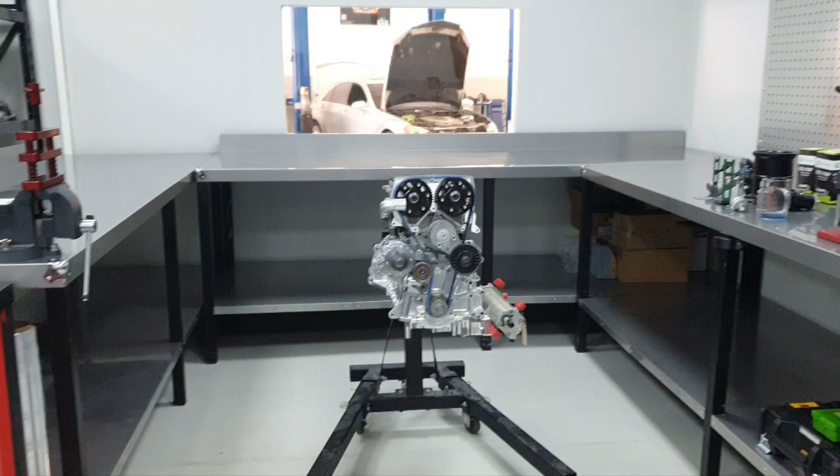Friday, January 12, 2024. 2JZ billet block. It's been built, clearly, obviously. And why it's here? Why it's here?

I don't know if it's okay if I can say all the story, what's happening. I'm not gonna say anything actually. It's not my business. I know the story, but no need to say anything.

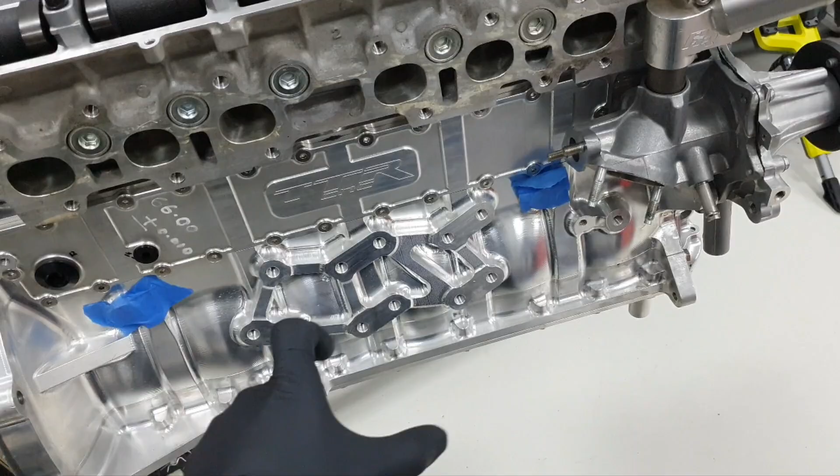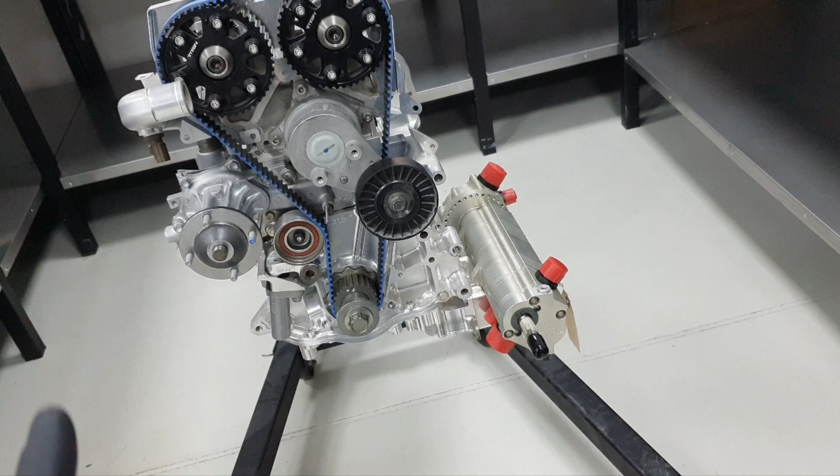Okay? Why it's here? I need to strip off completely the engine, measure the crankshaft, the journals of the crankshaft for the mains, for the connecting rods itself, the piston, cylinders, piston ring, do all the job actually, alright? And see that it's okay and doesn't have any problem. It never ran, the engine never fired up. They just put it together and they sent it to me here.

Okay? So, before I take it apart, what I'm gonna do? I'm gonna read the camshafts, when they're opening and when they're closing, to write down on the paper, because I wanna see in which degrees they put it exactly, for peace of mind. And then they're gonna send me the paper for the camshafts, where they're supposed to be placed, to be everybody happy.

Now, that's how I have received the engine. I haven't touched it at all. Even the engine stand doesn't belong to us. I received the engine with this stand, as you can see. There is a plexiglass here for the intake that I need to take out. There are these rags here on the spark plugs. They told me that the cylinder head is fine, no need anything.

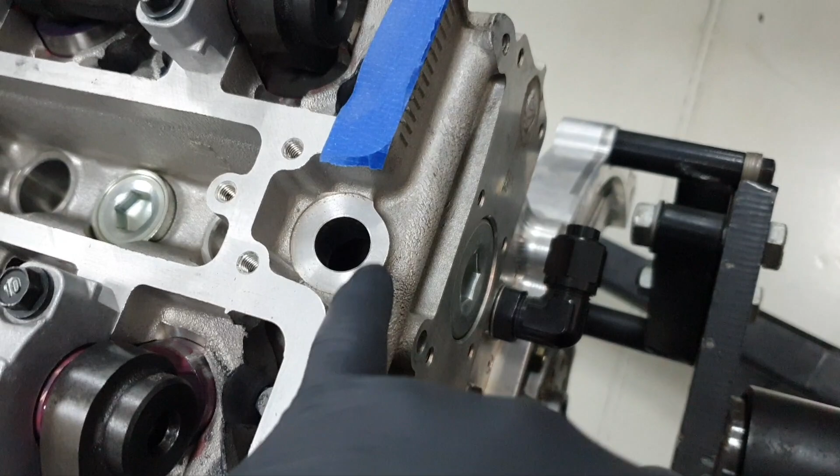Here, it's missing one fitting. From here, it's passing coolant. This is important to be here, the fitting. If you make the mistake and you block that one, you overheat number 6 and number 5 cylinder, the last cylinders. So here I need to have an AN fitting, as big as possible, if you're asking me. And you need to close the circuit for the coolant.

It depends in which country it's running. It doesn't matter if it's a billet block or a cast iron block, the stock block or whatever. You need to have this. You cannot block it, and obviously you're not gonna keep it like that. Usually they're welding here an AN fitting, and it comes here up. But you can tap it, you can thread it, and you can put stainless steel with some blue Loctite, and it can stay there forever.

Yeah, but it's okay. Usually they're doing it with aluminum. They're welding one aluminum fitting there. It's a little bit more sensitive and you have to be careful. Now, it's getting a two-way thermostat here. This is to not have fluctuation on the temperatures, to not cool fast, not be like the single-way thermostat. That's why you have this one.

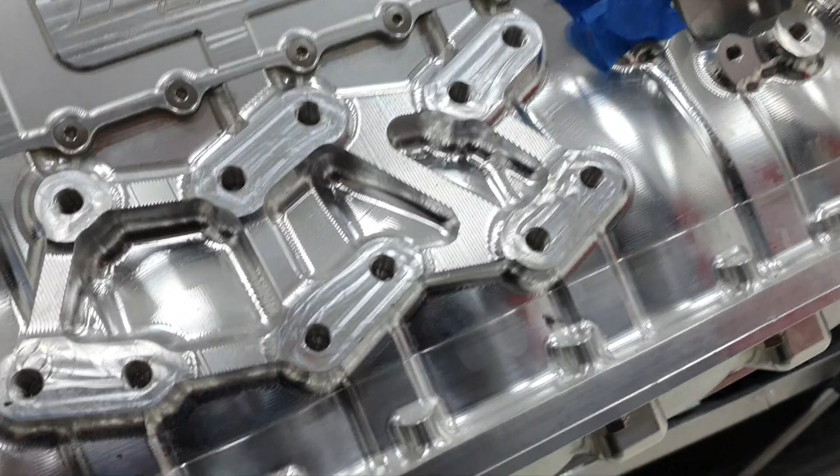But I don't know if it's smart to keep this function on a racing application, on a dragster application. Okay, this I'm gonna ask the owner, because for the cooling system, you can connect it so many ways. It depends on the heat transfer that you have, the ambient temperature, what kind of radiator you have. Sometimes you might not have enough space, or you might have an intercooler in front. You might not have correct airflow, and so on. All right.

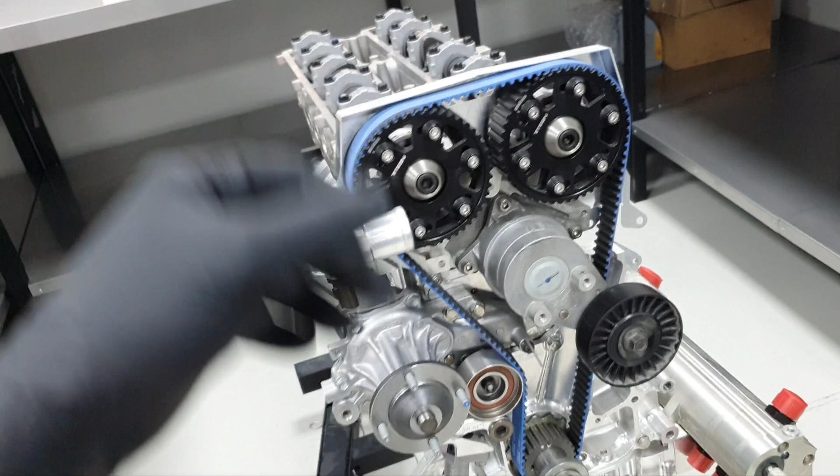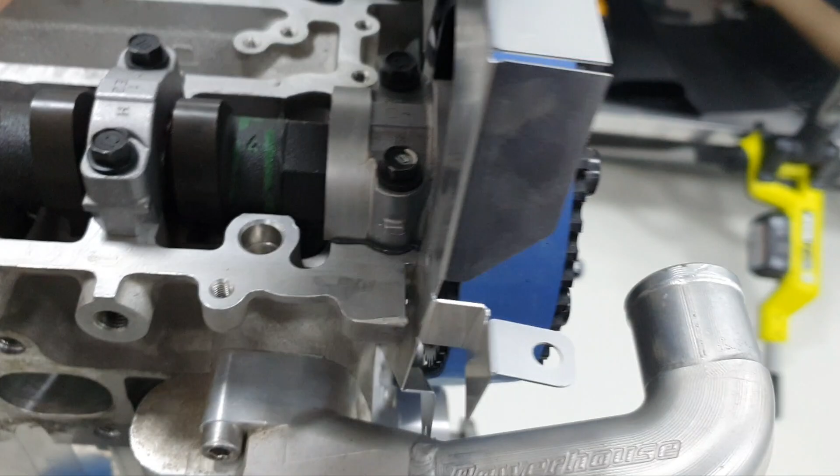So that's what I'm gonna do. Let me get the degree wheel, micrometer, and start writing some things down. Okay. This is not gonna be able to come out, because why? Because it's touching. Yes, because of this bracket. So I don't want to bend it. Yeah.

If you remove the upper radiator pipe here, it might be able to come out by turning. Yeah, okay, just a drop in the ocean. I might remove first this pipe here, then remove this one. So when I'm gonna rotate, it's not a big deal, it's light, it's just to not rub the belt on this cover. That's my point. Okay, that's it. Let's start working on it.

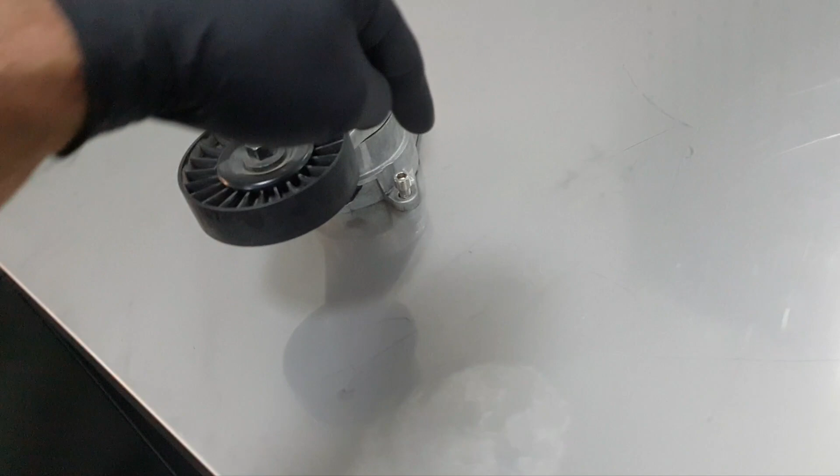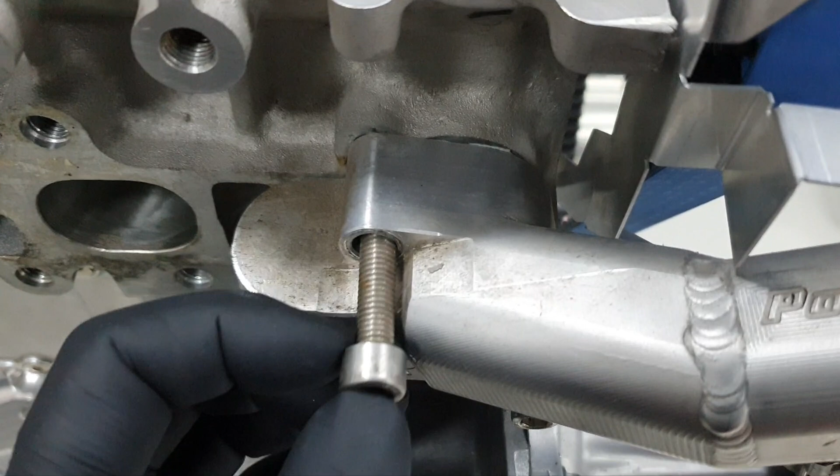Just for your information, I'm putting everything on the video, all the small details. I removed now from here the tensioner. None of the bolts was torqued down. Okay, I'm just saying. Here, these two bolts, they're not torqued down. This has correct length, the threads that are entering the cylinder head, but this up, it's not the ideal bolt to put on. You see, it's just engaging, I don't know, 2 threads only.

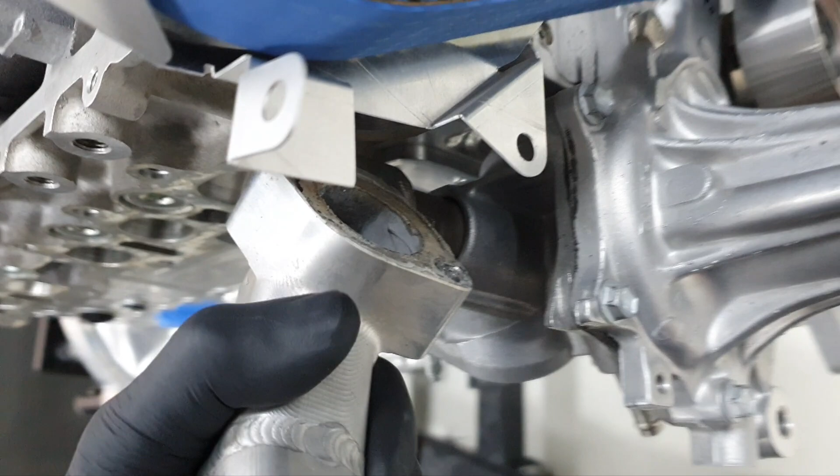So I'm not gonna choose this bolt for this. Then, I guess it does have a gasket. Yeah, it does have a gasket, it does have a silicone, it does have nothing. Yep. Here they put a silicone. The O-ring doesn't look new to me.

And there is one mark here on the cylinder head. When I make it up, it hit here. Alright, just give me a break. There's no problem at all. I didn't even scratch it.

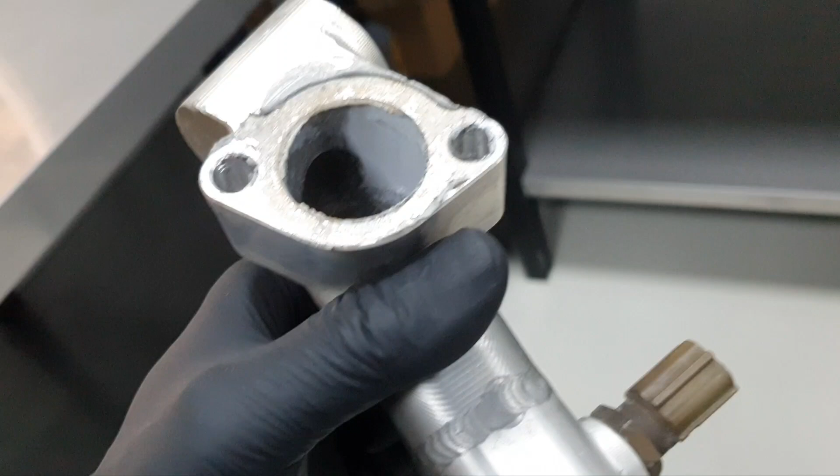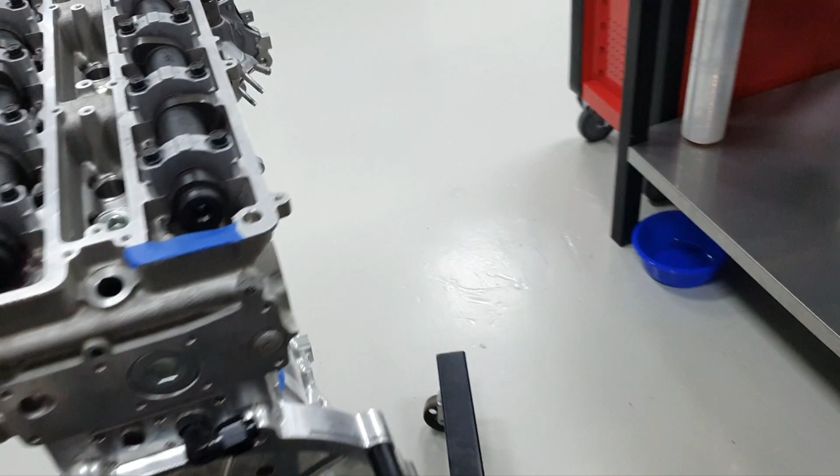Alright, so the long one was down here. The short one was up here. And now you can see the difference. You're not gonna choose this bolt here. You're gonna choose a bolt the same length as the other one, down. It's supposed to have enough threads inside. Yes, it does. It has even longer.

Then you have here this mark, this dent. And when you have this kind of thing, it's a good thing to file it, to not keep the plate outside, to not have any headache in the future. I also saw another thing here in the back. Here in the back, this is a plug, okay, like this one. It's like a ball bearing, but it's press fit inside.

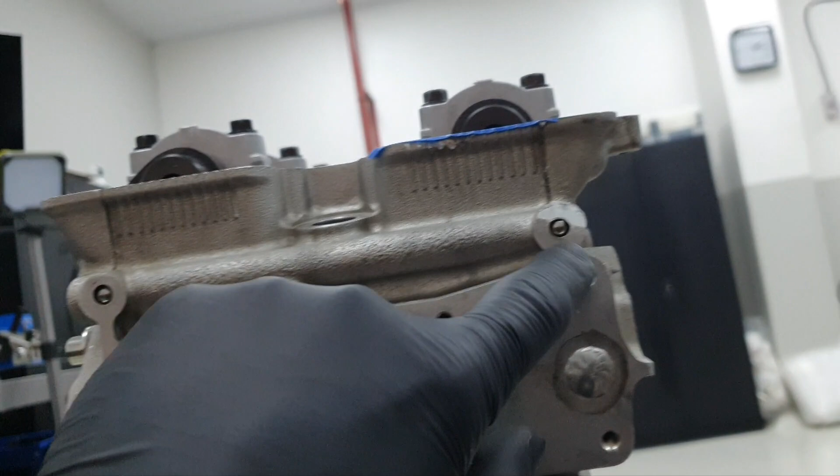Here, they dented it. It's not supposed to be like that. Cylinder head here, it's supposed to be like this, not like this. Okay, and it's supposed to have also another one here, because this is how they're drilling it from the factory. They're drilling like this, they're drilling like that. This is an oil gallery to supply oil.

Another thing here for the EGR that communicates with this hole here inside: you can put a fitting, thread it, make a fitting with one block like this one, smaller than this, it doesn't need to be so big. You can have it as a reference for the back pressure. You can unplug it, put the pipe, one pressure sensor, it will be far away, it won't get burned, and then you can have an idea what's happening between the valve and the turbine wheel. It's nice, it's not bad.

Okay, so you get the picture, step by step. Whatever I see and I don't like, I'm putting on the video, like any other time. Let's move on. And I'm getting the degree wheel. I'm trying now to put it on, to start degreeing the camshaft, to get the numbers actually. Alright, and they brought me the aluminum piece for the intake manifold.

Okay, I said don't bother me with this engine. Okay, we start nice. Let me pause this one now to finish the intake manifold for the C-Class outside, the 204. I have it over there, and then continue with the engine. Wish me luck, don't mix up the videos. I might mix it up and you're gonna see the intake manifold with the billet 2JZ. Lovely. Okay, finished with the intake manifold for the C-Class. You see Mr. Romer there? I have no clue what he's doing, yeah?

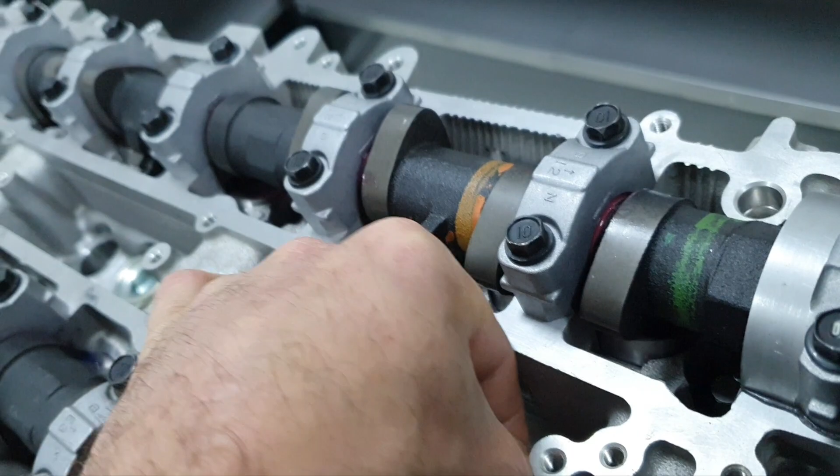Back to the 2JZ. Now, let's get the stopper. This is stopping the piston to find the top dead center. Where I'm pointing, I don't know where I'm pointing. I need to fix something on that to hold it. What I'm gonna do, I'm gonna use this stopper to stop the piston. Then I'm gonna go front and back, and then I'm gonna zero it out.

There you go. Come on, what, it's not clean the threads or what? Let me have a look, 1 second. Don't make any disaster here, any explosion. Okay, now we have 40 after top dead center.

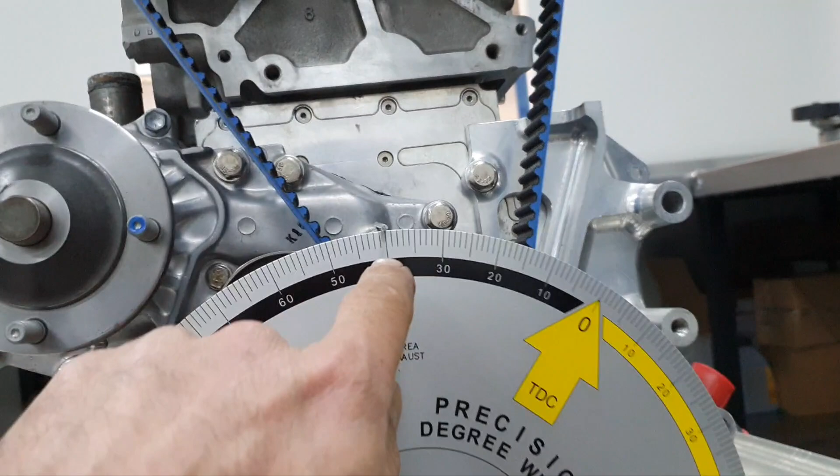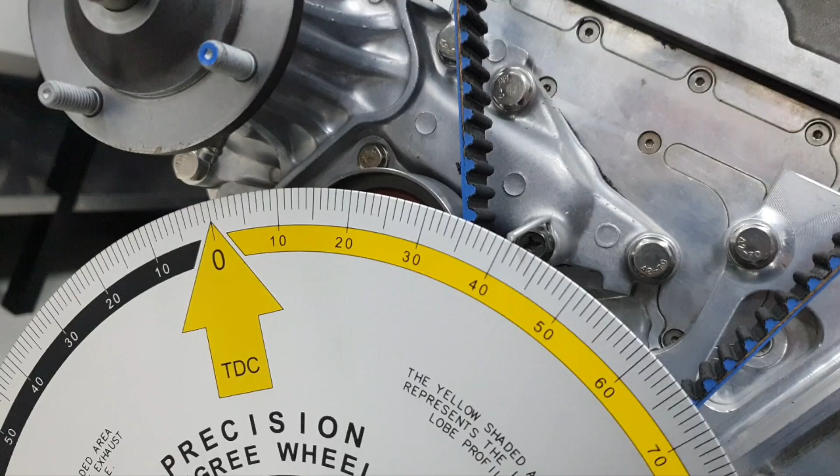Counterclockwise I use the degree wheel. And clockwise it will stop. It will stop me at 40 before top dead center. There it's stopping. So I have 40 degrees before top dead center, and counterclockwise I have 40 degrees after top dead center.

What is it? Before top dead center is here, 40 degrees before top dead center, and 40 degrees after top dead center when I'm going counterclockwise. So my zero mark here is the top dead center. Okay, let's do it. Let's remove the stopper and continue. And now this one, that's the true top dead center.

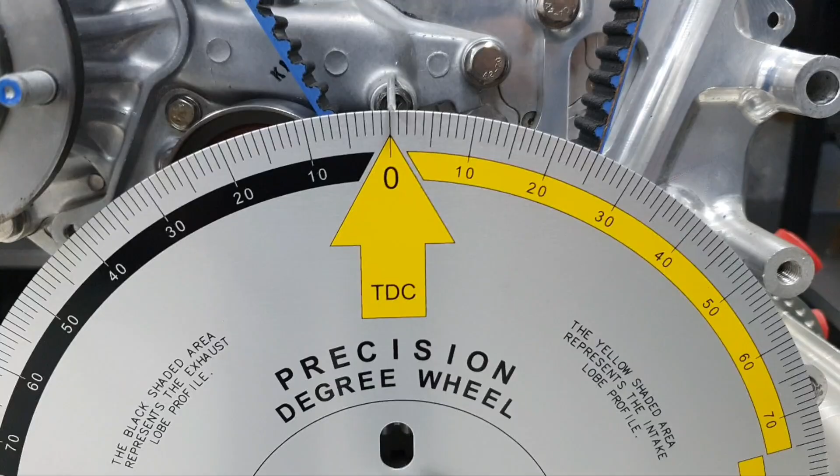Yeah, just make one dot on the center of the piston, but it's not important. It's not even a dot. We're gonna see that later when I open it, what it has inside. I don't get it, but yeah. Okay, let me get the dial indicator to start getting some measurements.

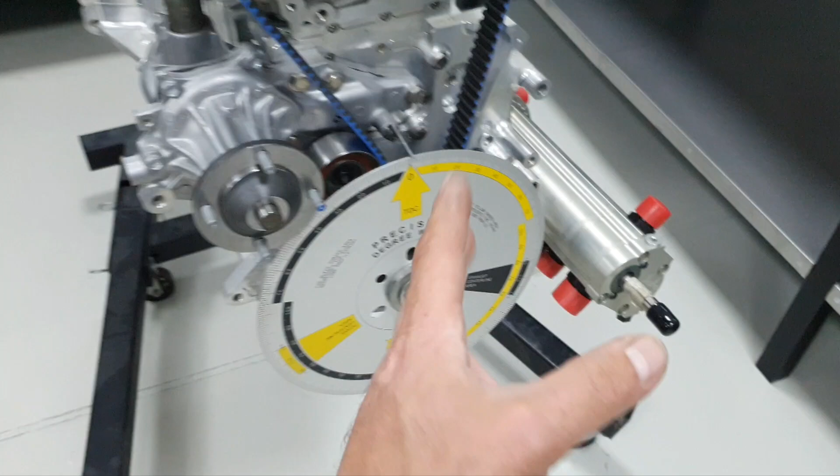All right, to see the degrees. Keep it as this. I torqued down the damper pulley, the bolts for the crankshaft, the main. And from now on only clockwise, not counterclockwise. Counterclockwise I did it only to find the top dead center. Now only clockwise so we don't compress the tensioner.

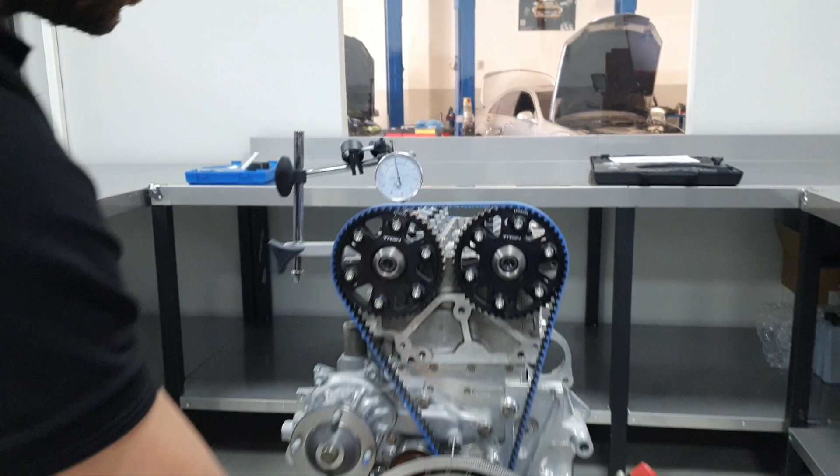I'm recording. All right, follow me here. We have here 100 millimeters, a little bit less than 100 millimeters, it's fine, it's acceptable. And here we are at top dead center, all right? I'm taking the exhaust camshaft. So now, at 1 millimeter lift, point down the micrometer, here. Let's go at 1 millimeter lift. It was a little bit past the zero, it was there.

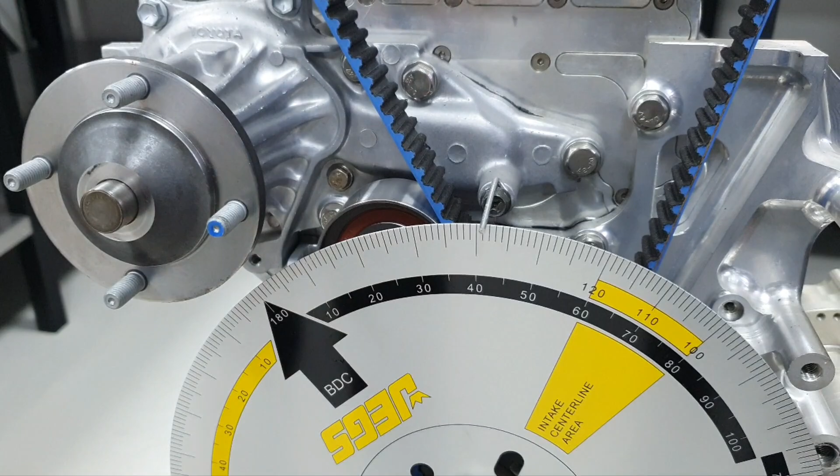Okay. So what do we have here? We have 41 degrees before bottom dead center. You get it? Come close. See. Don't touch anything here. 41 degrees before bottom dead center. What I have right here: exhaust valve opens at 1 millimeter lift, 41 degrees before bottom dead center. Correct? Correct. Let's move on.

Now, the lift for the exhaust valve is 10.06 millimeters. I highlighted it here. Let's find it now. It moves 1, 2 millimeters, 3, 4, 5, 6, 7, 8, 9. Wait, no, stay there. Stay there. Okay. 10.

Now, if I move it more, you see it's 10.06 millimeters the lift, okay? And you see here, it's at 105, the center line. All right, I wrote down 101. Now, where I found 101, in any case, skip this one. Let's go 1 millimeter before closing the valve. A second, shift it. No, it's okay. Stay there. All right.

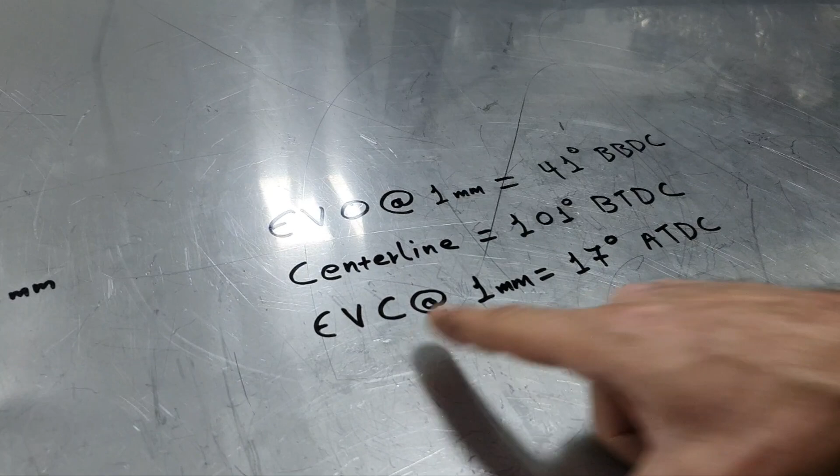Now, there, it's 1 millimeter before it closes the valve. And here we have almost 17 degrees after top dead center. Come here. Exhaust valve closes at 1 millimeter lift, 17 degrees after top dead center. That's what we have there, right? Yep. After top dead center, 17 degrees almost.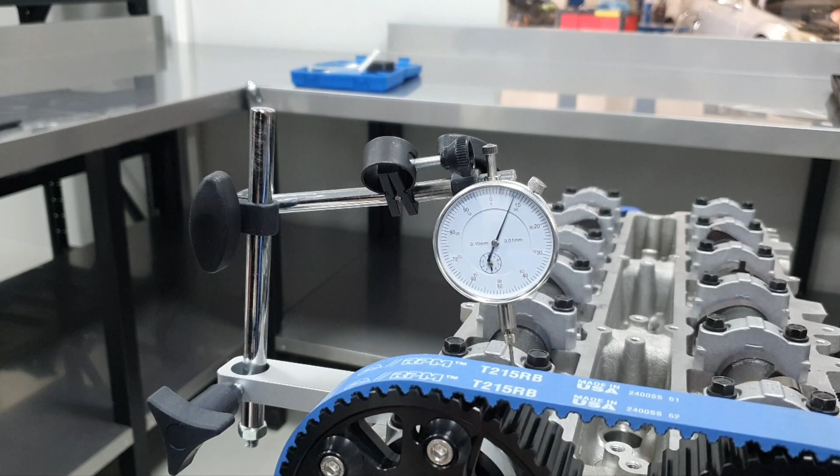Let's do it again. Put it there. You see, it comes again. All right, it's fine. Let's do that again, one more time. Let's spin it. Now, let's go again at 1 millimeter. All right, and we are 41 degrees before bottom dead center. That's the key. 41 before bottom dead center.

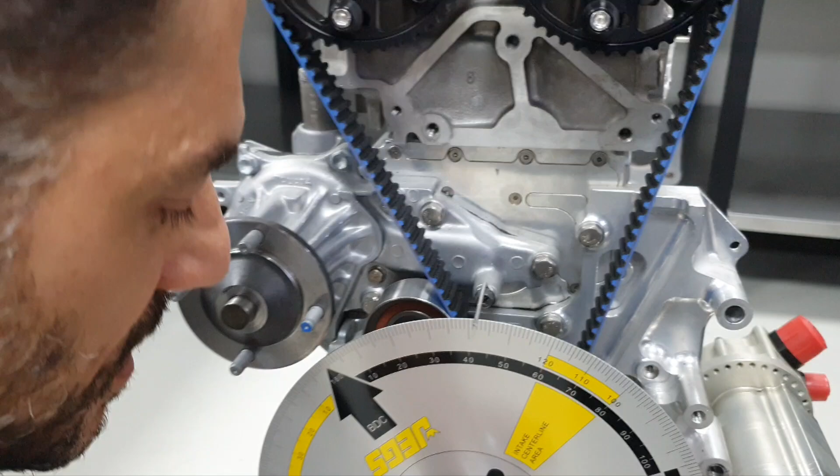We are going to the 10.06 millimeters. Okay. It's supposed to be there, because now you see it's 101. Yeah, it's 101 now. Now if I move it, it's gonna start closing the valve. You see? All right.

And then we have, keep it there on the indicator. Okay. So now, 17 degrees after top dead center. At 1 millimeter lift, it starts closing the valve. And now let's turn it to go to top dead center, because I have to do the same thing on the intake. All right, that's top dead center. We have almost 100 millimeters till the zero point.

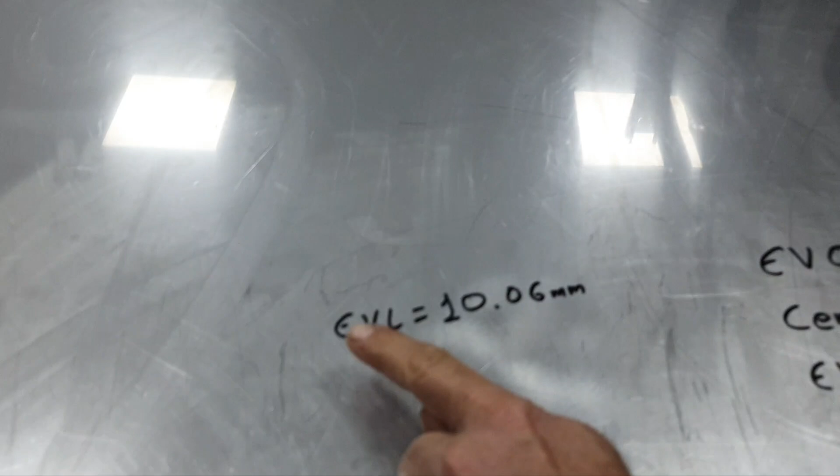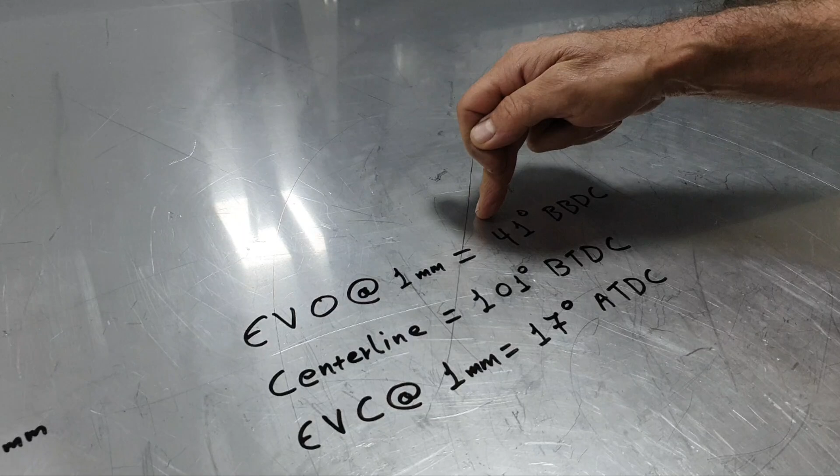And what do we have here? Exhaust valve lift for the specific lobe: 10.06 millimeters lift. The exhaust valve opens 41 degrees before bottom dead center. Center line 101 before top dead center. Exhaust valve closes at 1 millimeter lift, 17 degrees after top dead center.

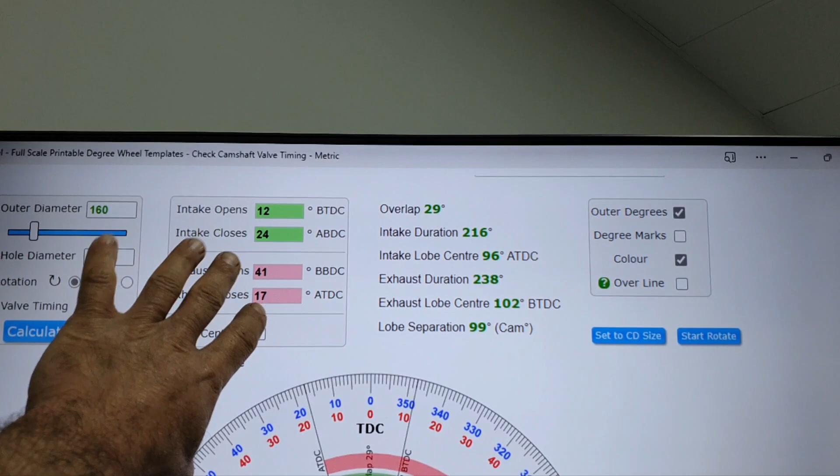Now give it to me here. I put in when it's opening the exhaust valve and when it closes the exhaust valve. And it tells me that exhaust duration is 238 degrees. I don't have to calculate. And exhaust lobe center 102 degrees. Lobe separation, okay. Don't pay attention to the intake because I haven't measured the intake yet. The intake is the data that was there.

Now, let's continue. Let's do that on the intake lobe to read the camshaft. By having this data, I'm gonna know exactly where they degreed the camshaft, and when they bring me the specs, compare from there. Another thing I need to do is see how much clearance, how much I can move the gear, to see how much room I have between the valve and the piston so there's no contact.

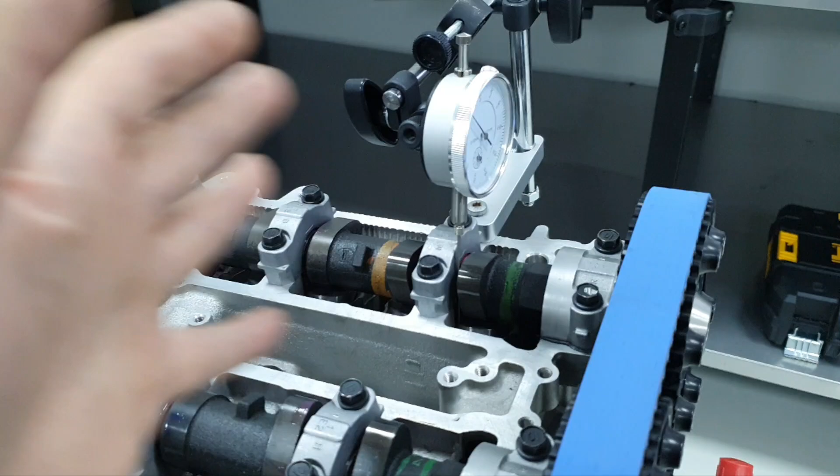How much I can go advance or retard to see what's going on. Continue. All right, let's have a look at the intake. I have done this 4 or 5 times. I don't even remember how many times, because some of you are gonna say, what is this, what have you done? As long as it's not spring loaded and it's solid and it's repeatable, I'm happy.

Each time that I'm doing it, I'm resetting it. I'm removing it from the zero and I have to zero it out again, all this that you see, and I repeat again and again. All right, 4 or 5 times till now, the same thing also for the exhaust. Classic like any other time. All right, now, what do we have?

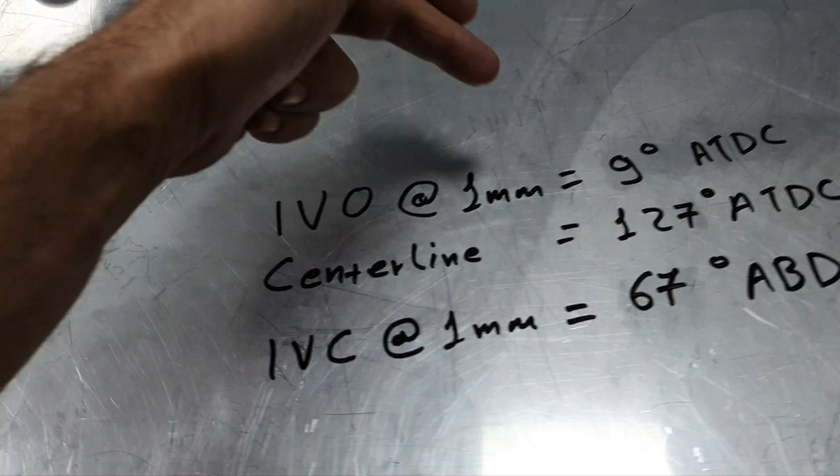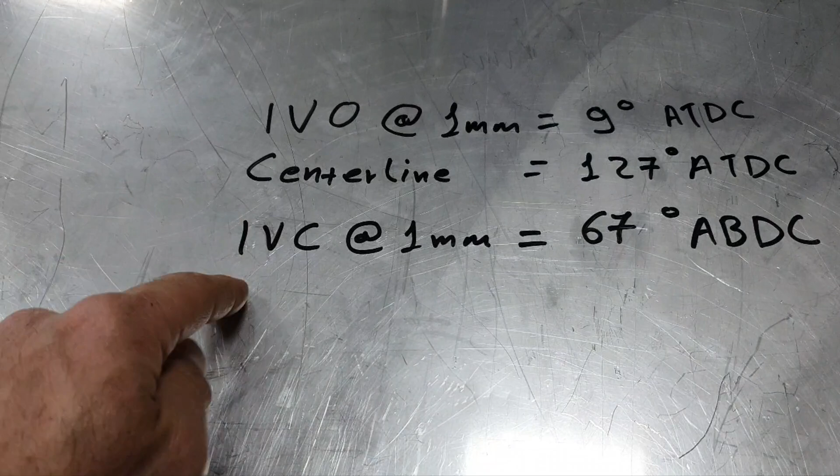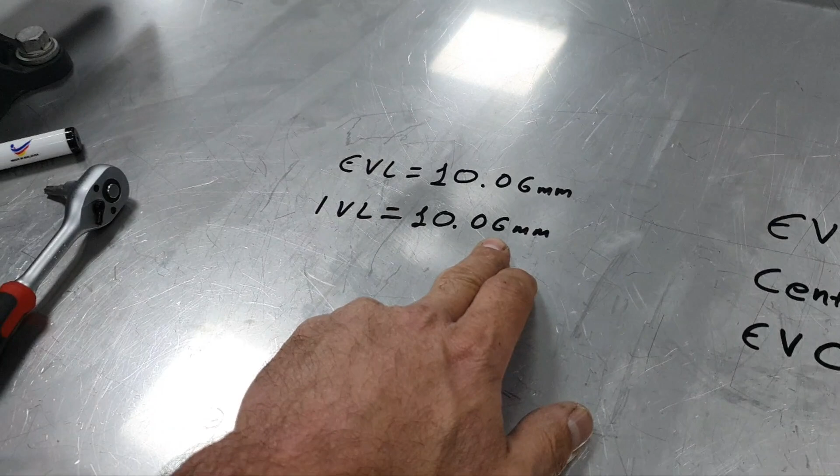Intake valve opens at 1 millimeter lift 9 degrees after top dead center. Okay. Center line at 127 degrees after top dead center, 127. I was expecting to see something like 107, and I was expecting to see something like 11 degrees before top dead center. Yeah. And intake valve closes at 1 millimeter lift 67 degrees after bottom dead center. Okay. Now, 10.06 millimeter lift for the intake valve and for the exhaust valve.

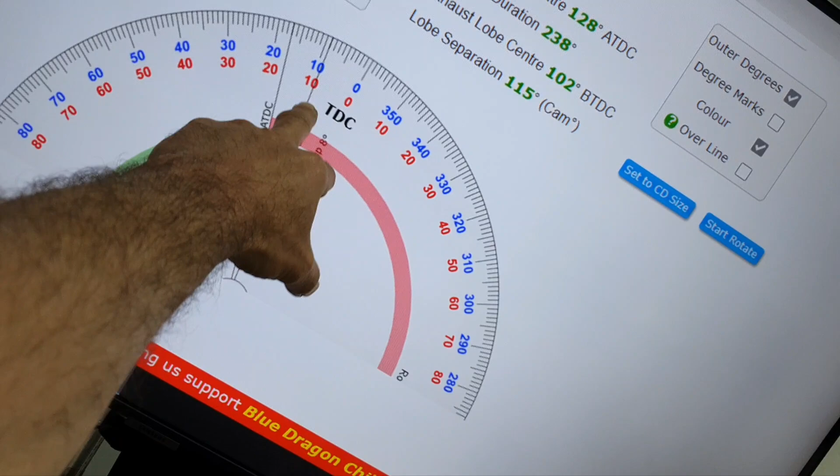All right. Center line, I found it 127, and what we have here is -9 because it's before top dead center. So if I put 9 degrees before top dead center, I'm not gonna be right. I have to write minus. You can see here, -9 degrees before top dead center, you see? And it's after. Yeah, that's the point. 67 when it's closing, and it's giving me intake duration 238, exhaust duration 238, okay.

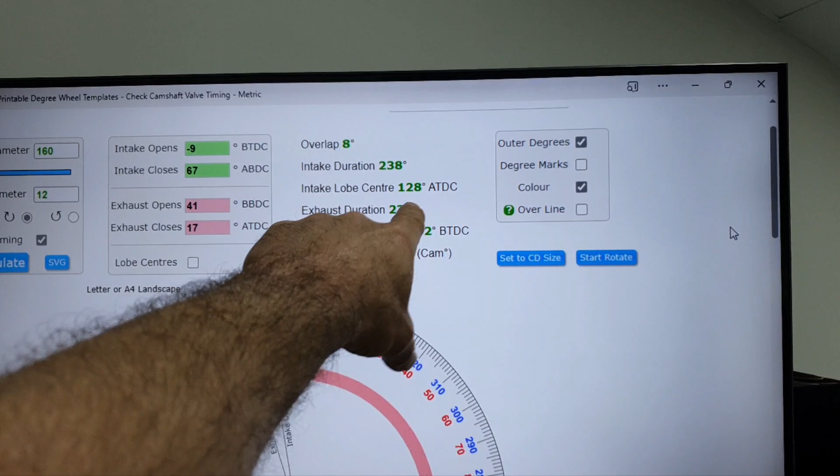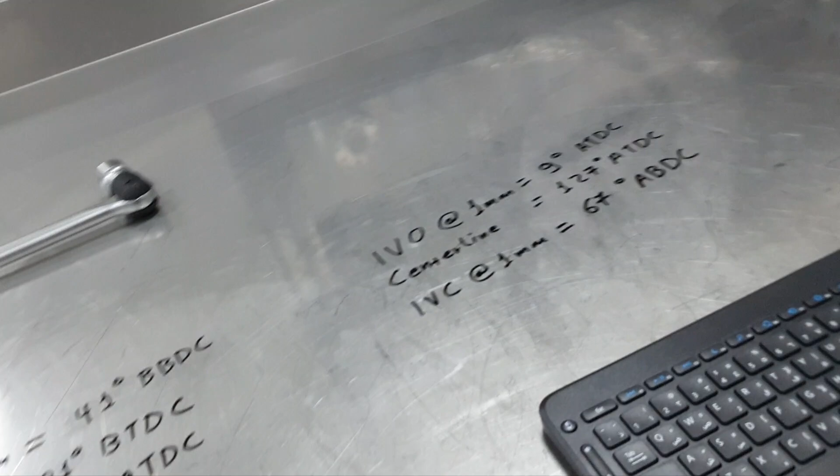Intake lobe center 128, I found 127, all right. Yeah, you can give me half a degree plus minus, okay. Give me a break. Now, I want to see the specs for the camshafts. All right, I'm gonna write it down on paper to have this data. And now, since I know the camshafts, where it's supposed to be, how it's been degreed on the specific engine, I can see how much I can play, right? I can see how much I can play.

This is full at the end. It's not worth it to change the teeth and then it might not. Yeah, okay, it is what it is. You might play with the teeth and then the adjustment, you know. All right, never mind, this is not the time. I just want to see, now we're gonna bring the camera. I just want to see how much distance the valves have, because now it's a good chance.

Why? Because there is the head gasket that you're gonna run this engine with. Everything has been bolted down. There is no dummy gasket, there's no old gasket that I open and close again. So it's a very good chance to see how much room we have, how many degrees before we touch the valve, how much I can go maximum and minimum. Because after that you can't play.

It depends where you want the torque, where you want to have horsepower. For example, you can shift the power band. It depends on the application, the transmission, the gear ratio, it depends on so many things. It depends even on the drag the car has. It's different if you have a good aerodynamic car, and different to have a curtain, a parachute, trying to beat the wind, the air. I hope that you understand what I'm saying.

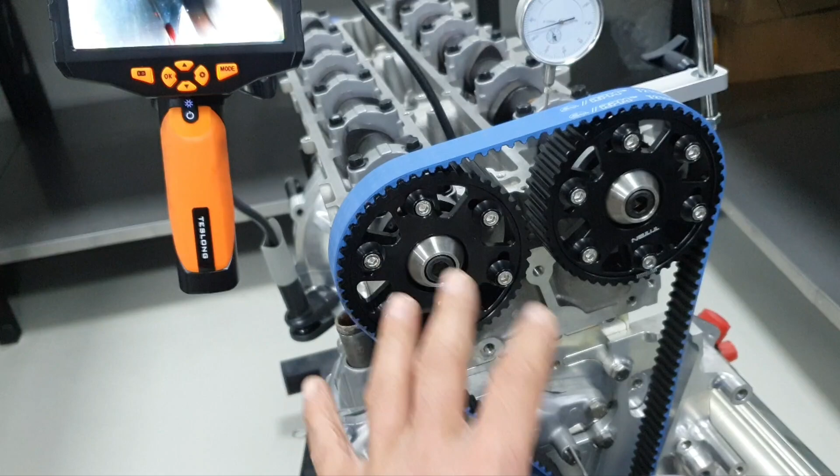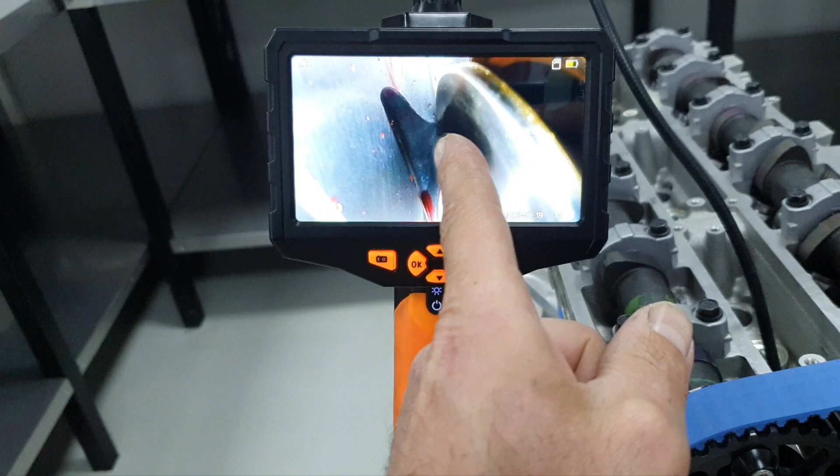I'll just have a look here on the exhaust to see how much space we have, and as it is right now, there is plenty of space. You can put it wherever you want. It's not gonna touch. What you see from here till this is the cut relief on the piston, and that's the valve here. Plenty of space. I'm gonna show you.

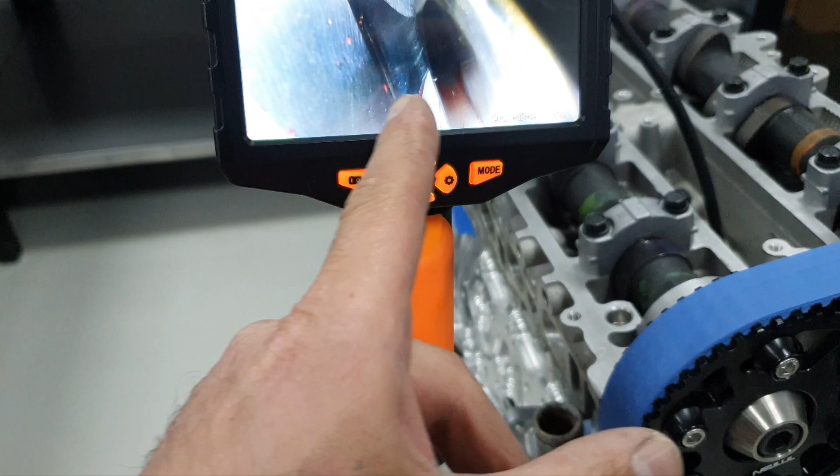Okay, that's the valve here, and this is when it's open, and now it finishes the gear. Oh, with these pistons there is plenty of space. I mean, if you have valve contact to the piston, that means either you have too many RPMs or you have too much boost, and not on the exhaust. On the exhaust, the back pressure. It depends on the back pressure that you create inside the manifold. From the intake I'm talking about.

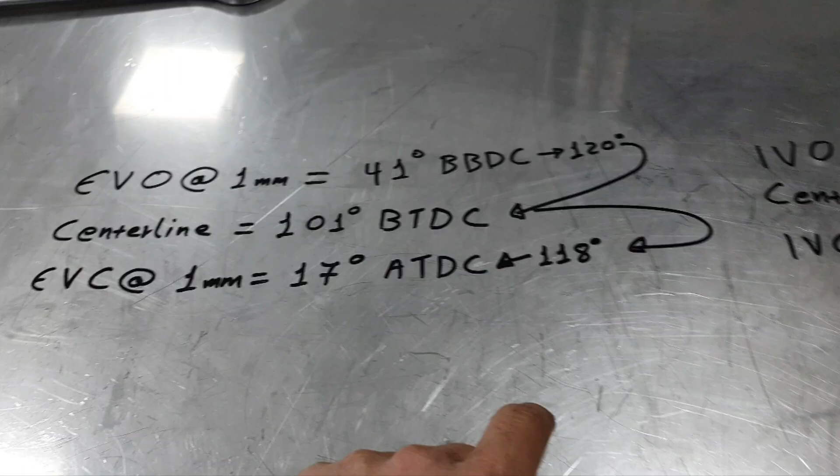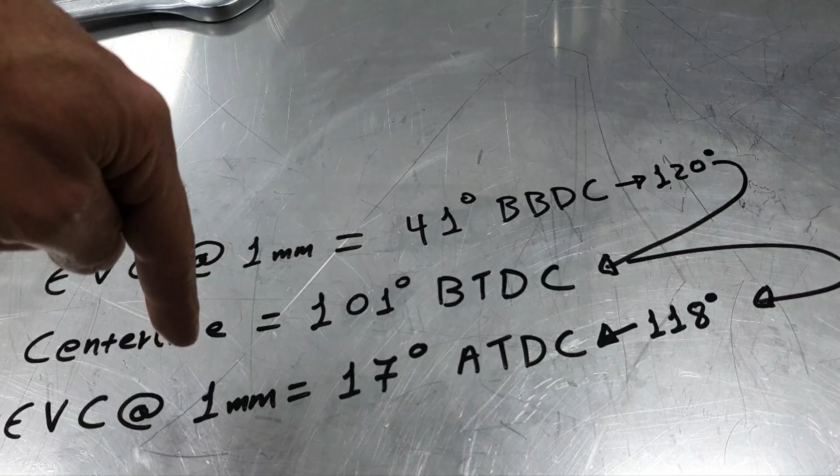All right, let me remove everything. And then, like I said, I write it on a paper. If you're wondering what these numbers are, this is 41 degrees before bottom dead center to go to the center line, to the maximum lift of the lobe. At 101 before top dead center, it needs 120 degrees. That's one lobe. That means it's almost symmetrical.

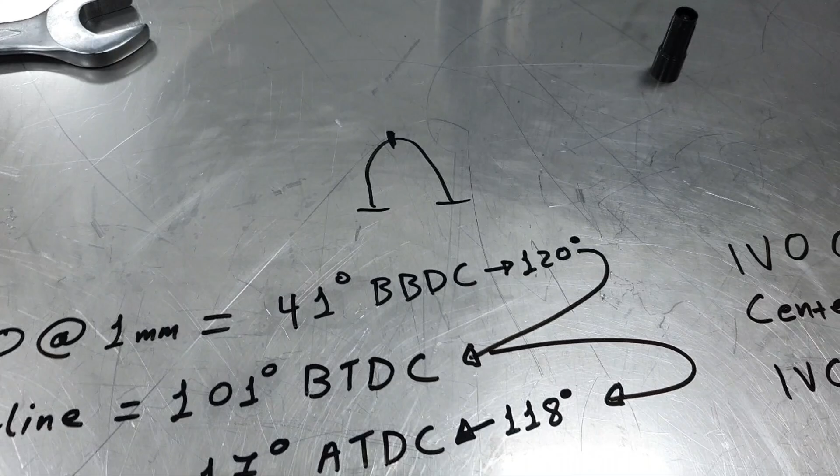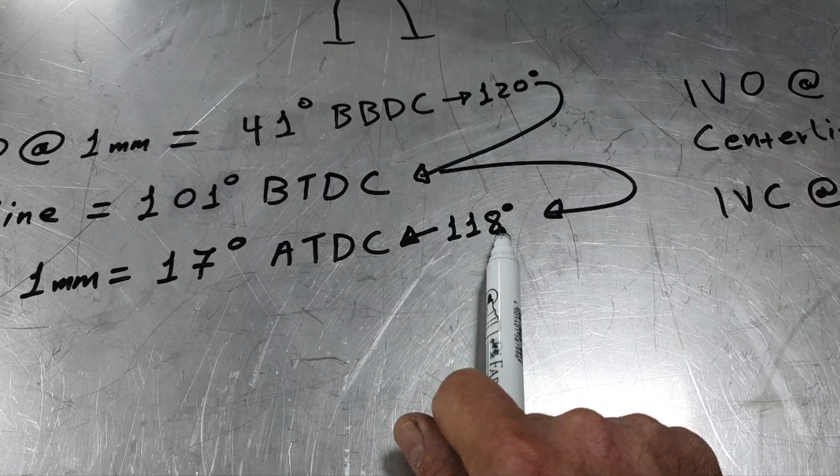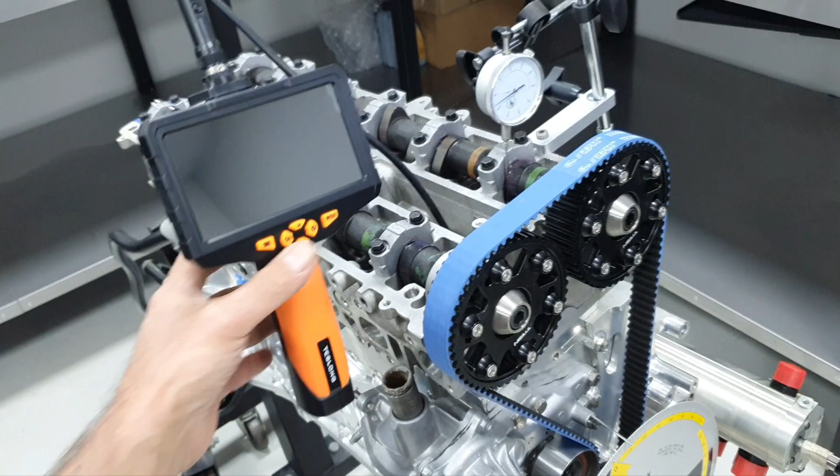I need the paper for the camshafts, and I have to continue stripping off the engine. Let me tighten also this gear. I write also which mark it was on, just in case. Not something crazy. I'm not torquing it down for final, obviously. Usually with these gears, even if you torque it down, let's say, 5 Newton meters, it's more than enough, it doesn't slip. I have to see the torque spec, supposed to be something like 10 or 15 Newton meters, I don't remember exactly. I'm gonna check it. In any case, let's move on.

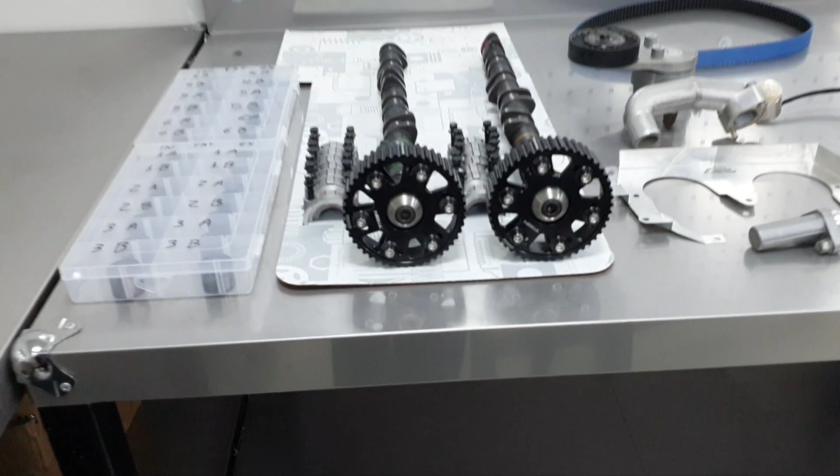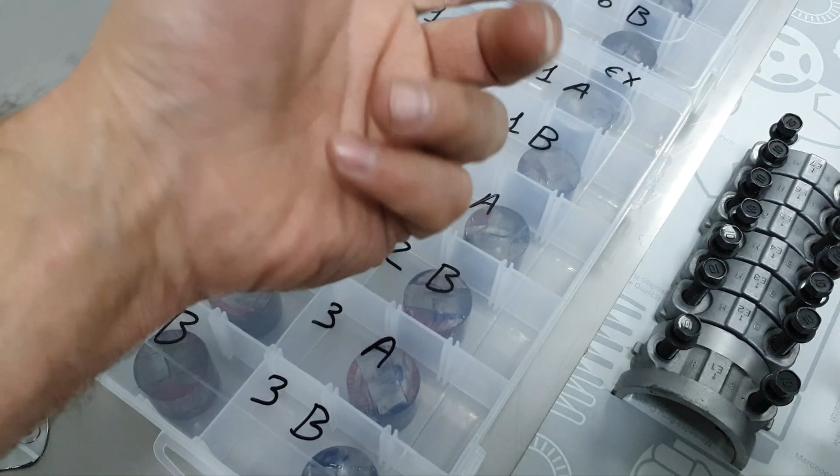All right, camshafts, cam followers, the caps up, out. All right, it's in order here. Exhaust, intake, and these are the cam followers. It's not hydraulic. It's normal buckets that you grind inside to fix the clearance. It's in order because if you mix all this up, then you have to find out which one goes where. You'd be busy with one feeler gauge all day, maybe two. This one has masking tape. I don't get it.

Aha. I was wondering, I saw that before. I said, why have masking tape on the cylinder head here? This here has a dent, and here has a crack. That's why there was masking tape here. Who put the masking tape here? They put it to hide it or what? Yeah. Lovely. You remember, I think I mentioned that about this head. Alright, moving on.

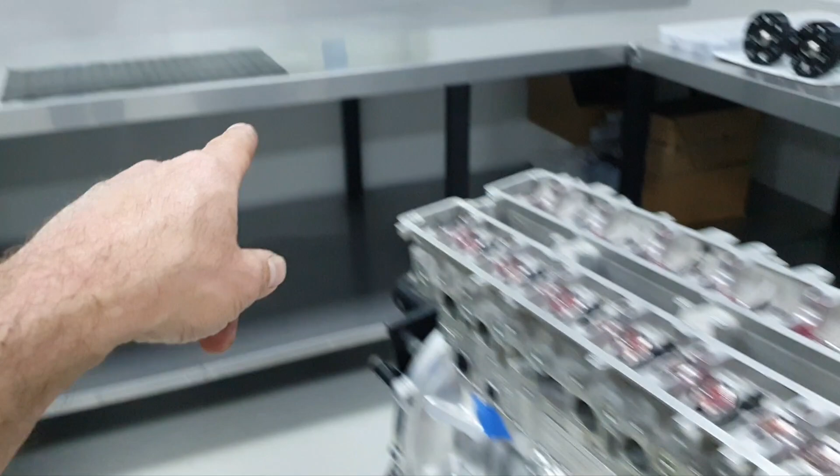I removed the belts over there, okay. The tensioner is over there. This is not mine. It was very convenient that it was here because I used it for the degree wheel. I'm gonna put it back in place at the end. Alright, moving on, stripping it off, removing the cylinder head. I have the rubber mat here to place the cylinder head on.

I just removed the followers, the cam followers, the buckets. Why? Because I'm gonna tilt it and put it here to see the combustion chamber side. I just want to put it sideways to see the surface, to see the combustion chamber, and just to have an eye on the intake and exhaust valves. Let's continue, let's open it.

By the way, these studs, you cannot put them in like how I put the previous studs, because they're a different diameter down in the block. It's bigger. So this is an exception. You cannot do it like normal studs, where you put the head gasket, the cylinder head, and then pass the studs from above. It's not gonna work because it's bigger down and it's not gonna pass through the cylinder head. Makes sense, right? Let's take it apart.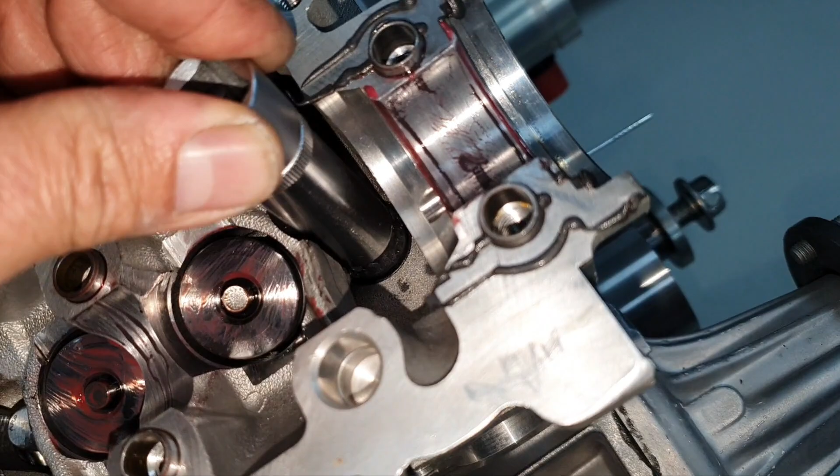You remember the last time with the previous 2JZ, with the 1/2 inch socket? I replaced it, I broke the first one. Now in this case, it looks like it's 9/16. But you need a long 9/16. I don't have a long 9/16. What do I have? I have 14 millimeters. What's the problem with the 14 millimeters? The only problem is that it comes nice and tight. This is not a problem, this is a good one, this is always welcome, when the socket fits nice and tight.

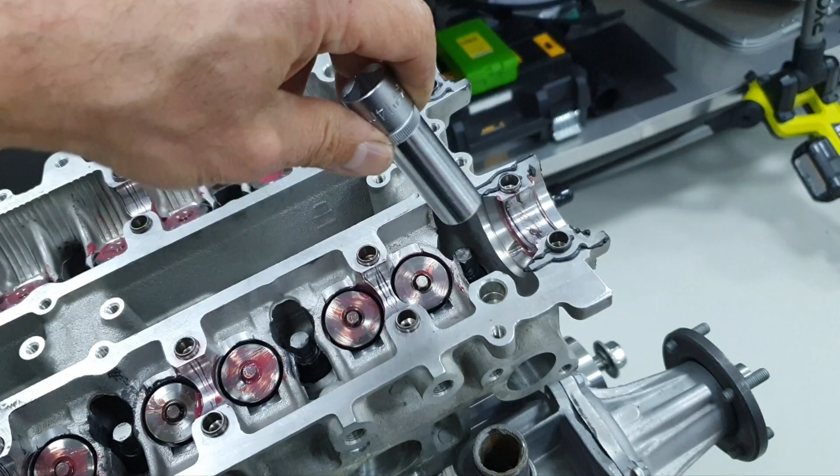The thing is, what it takes, I can tell you what it takes. On the inline 6, when I have such a long cylinder head, me personally, I don't know what the other guys are doing, but me personally, I start removing a little bit. I mean, I'm not loosening completely the nut in this case, or the bolt if it has a head bolt. I'm not loosening completely this one, completely that one, and then moving on to the rest. I'm going gradually, a little bit each nut, until it lifts up nicely. In the same order as you're torquing it down, same thing in reverse, that's how I'm taking it apart.

And now I have to stick this inside and then unstick it how many times? Tassos, stop complaining, eh? Leave the phone and start working. That's what I'm gonna do.

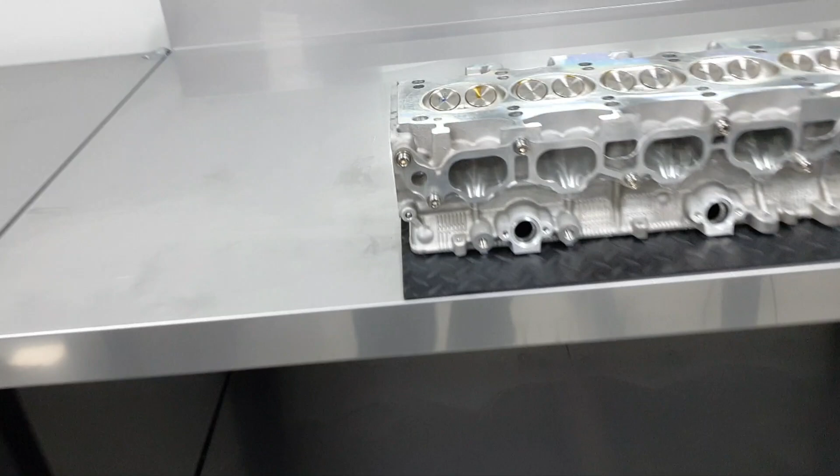Cylinder head out. I'm gonna show you a couple of things that I've been screaming about for years now. I'm saying that when you have the studs like this, in this case you cannot put it from up. Like I said, it's impossible to put the cylinder head on and then pass these studs from up, alright? Because it's threaded inside of the engine block. But I'm saying that when you put the studs like this, you're always gonna trap some metallic shavings between the head gasket and the cylinder head. This is 101, that's what I'm talking about, alright?

Second thing, what I see here and I don't like, I see that there is a misalignment and I see the fire ring entering inside of the chamber here. It has a lip. What I'm talking about is clear, to my eyes at least. You see that I can see here the sleeve, the cylinder? There is a lip here. I'm talking about here, there is a lip, alright? From this side, there is no lip.

It's positive. The ring is entering inside of the cylinder. That's not right. And here it has plenty of space. That's not right. It's not aligned properly. It's not correct. Then if you come here on the cylinder head, you see another big mistake, I'll say. I'm gonna show you. Let me get one ring from here. Let's get number 3. Why not? All right. Oh, come on.

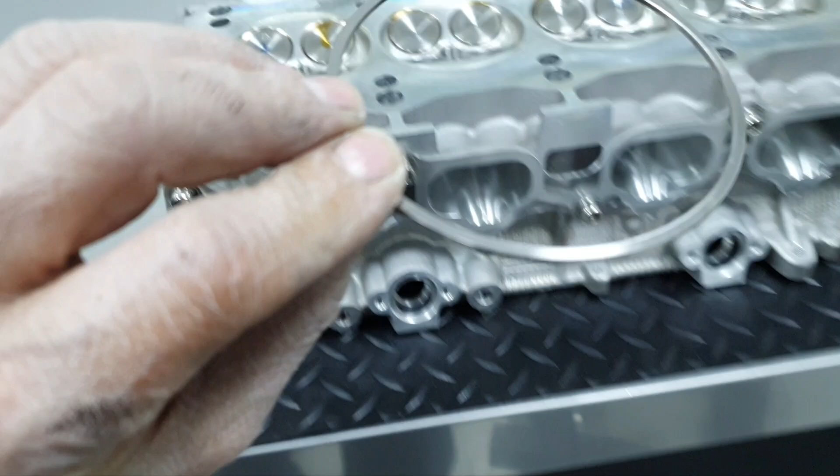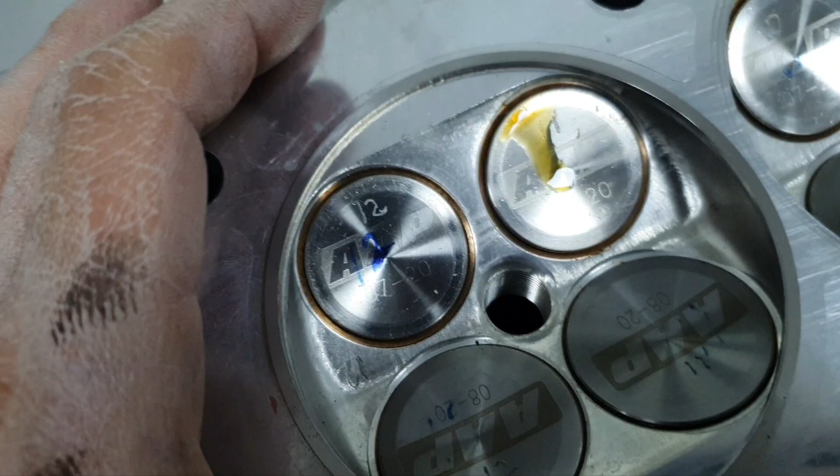This here with the grooves is the cylinder head side, and the flat one is the deck, the block, all right? So now if I place it on the lines it has here, let's make a comparison to see how it looks. Let's put it exactly as it was, right? It even sits there. See where it is. If I remove it, see where the line is. There are 3 lines, 1, 2, 3. There is not a single line. That means on this ring, 2 lines are inside of the combustion chamber, and only the outer line is touching here on the cylinder head.

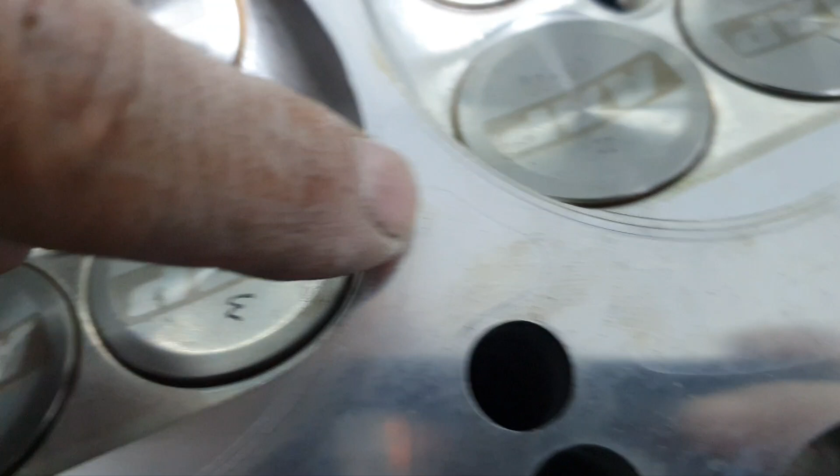Only the outer line. When you place it here, it doesn't move because it finds the groove. So if I had to guess, if you spray nitrous, or you have a racing application like this one, obviously the first thing we're gonna melt, we're gonna burn the fire ring, it's gonna be here, or here. Same thing here. And there is room between, what I mean by that, I'm gonna show you. If you place the fire ring here, yes, that's where it goes. Pay attention, between there is no gasket, it's the fire ring with the fire ring.

Let's get out number 2 also. If you get number 2 and put them side by side, oh, come on, find the groove. Okay, no worries, let's go on this angle. Not a big deal. Yep, I found the groove. You see that the fire ring could be a little bit greater, so it's not inside the combustion chamber, doesn't make a lip, isn't exposed inside the combustion chamber. That's my point. Also, if you look at head gaskets, no fire ring enters inside the combustion chamber. That's my point. This I got from number 2. It doesn't matter. It's been compressed. It's been used.

These small details, when the time comes, you're gonna see that they make a big difference. These small details are what I'm screaming about all the time. When you have a misalignment here, that's not right. It's not right to have a step here. I hope you understand what I'm saying. Here you have a step, here you don't see anything, because here it's entering inside. This is supposed to be more to this side. Yeah.

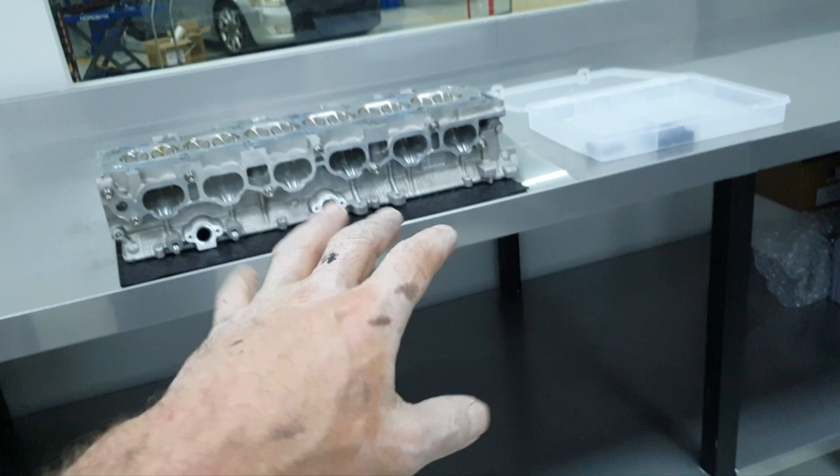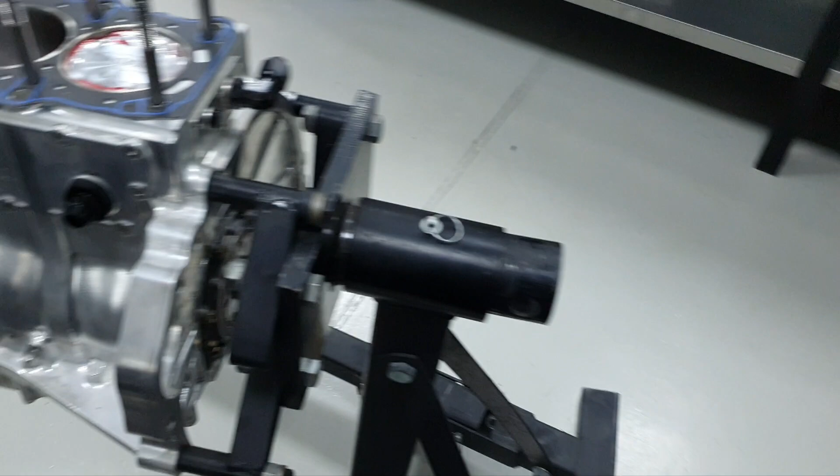I have here a couple of washers that came out when I turned it, because first you put the washers on the cylinder head with a little bit of grease, then you put it inside, and then you pass the nut, because after that it's impossible to pass the washer. On these studs, you see the studs, right? So leave the cylinder head where it is.

Then, let me see, because from the top dead center finder, I make this one on the A. I make one small dot. This is not gonna affect anything, obviously, okay? It's not a big deal. I don't like how the cylinders look.

Usually in these applications you don't make a cross hatch, but again it might backfire on you. It all depends on the application. There is no visible cross hatch. If there is, it might be, and there are also some dots on the cylinders. Yeah, you don't feel it, but okay. Let me remove the gasket and also put the fire rings in order and continue.

You know what I see here? I see that there is room to shift it this way. And if there is a 0.5 millimeter bigger fire ring, I'm talking about this one, it's always welcome. And you can massage the head gasket a little bit to go that way, because again, even here there is no good alignment. Alright, let's take it off.

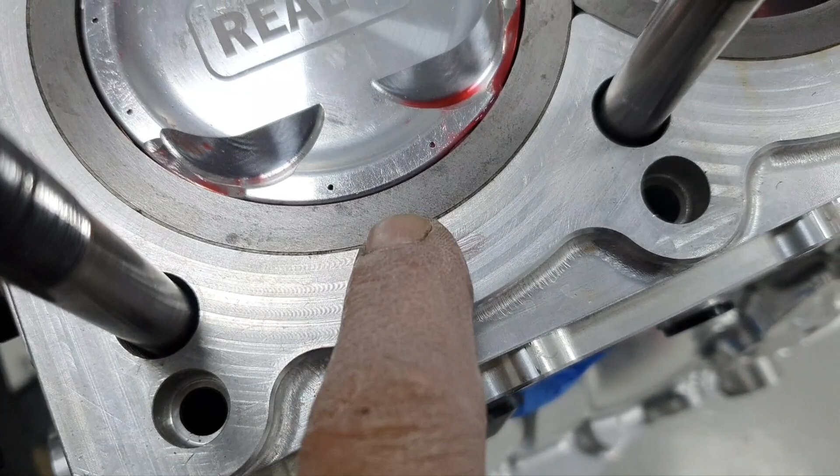Let me remove it. I'm removing the studs and I'm wondering... First of all, you can see a shadow here at this point, and you can see a shadow here at this point. And it's not the same. Here it steps much more, here it steps less. And on the cylinder head, what kind of alignment have they done?

I mean, if it was equal... Let us say this is the outer line. That's the outer one, the two entering inside. And here you see one, two, and almost the third one, the inner. Here you see only the two. It has to do with the position of the studs, the position of the sleeves, how it's been machined.

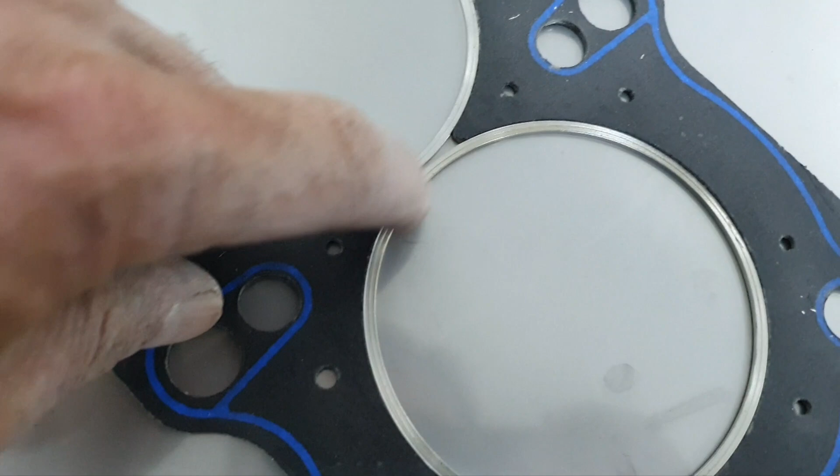And definitely if there is a 0.5 millimeter greater one, I think you might have 2 millimeters here actually, to make it 1 millimeter greater, so it doesn't end up inside the combustion chamber. That's my point. And what about the alignment after that? Okay, let me continue removing the studs. No measurements yet, I just remove the studs, alright?

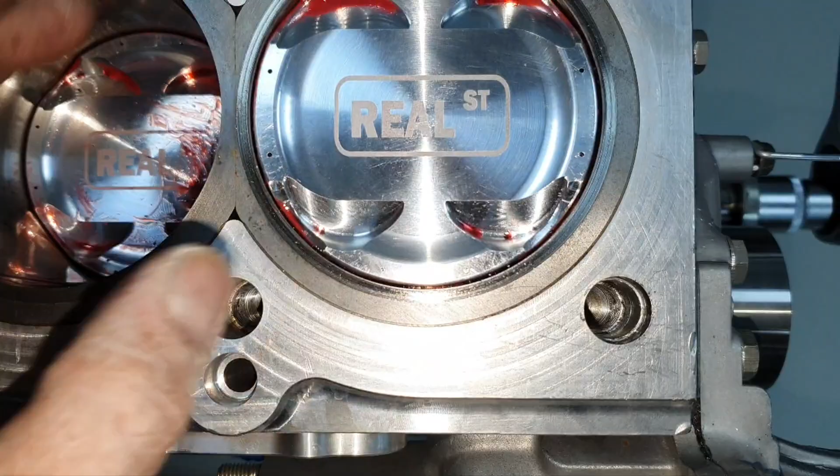I get the fire ring, and if you align it, it's leaving at least 1 millimeter. So the diameter of the fire ring is supposed to be fine. The only problem is the misalignment. Okay. So let's put it back in there.

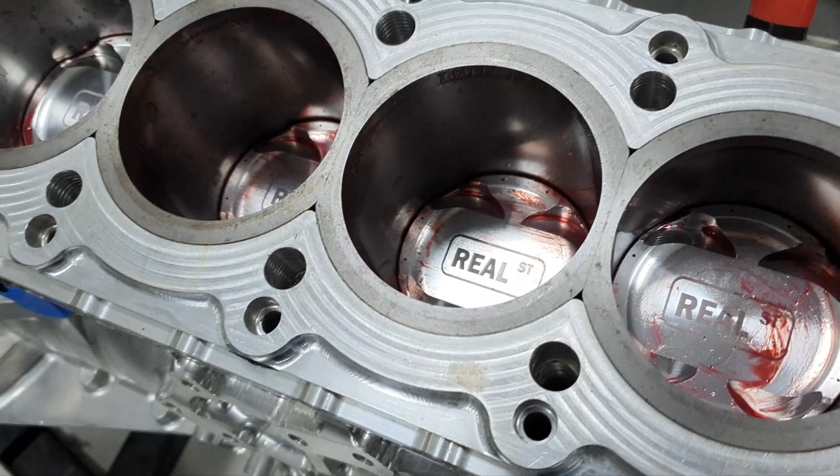Then it turns a little bit tight for this application. It doesn't spin. It's supposed to spin more freely. And I can also hear the piston rings. Even though it does have a cross hatch, it's barely there. It's supposed to be nice and smooth. You're not supposed to hear anything, actually.

Okay, I'm not gonna continue today. Tomorrow I'm gonna continue. I'm gonna remove the water pump and a couple of other things, but the rest tomorrow. Now I feel like I have a 3-hour video, and I might put all the clips together to be less than 10 minutes. We're gonna find out. The rest will be tomorrow, not today.